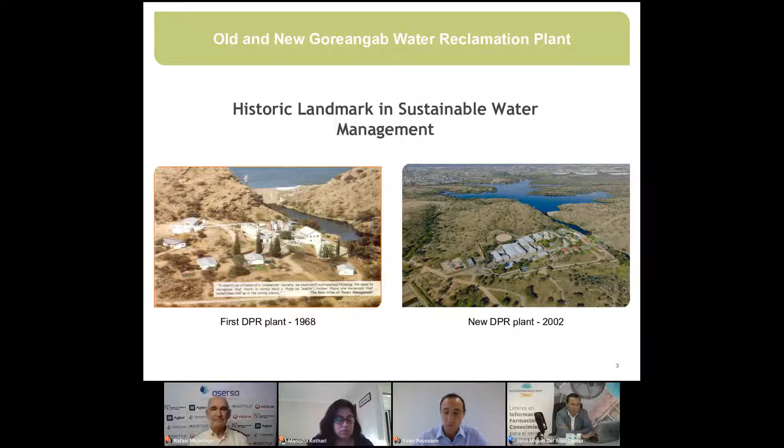So you see 2 pictures there. The first direct potable reuse plant, commissioned in 1968, which had a capacity of 4.8 megaliters per day. And the new DPR plant, direct potable reuse plant, on the right-hand side, which was commissioned in 2002, with a capacity of 21 megaliters per day. These 2 assets, the first one was decommissioned, the other one is still running to date and still producing potable water for the community and inhabitants of Windhoek, have been milestones in the development of water reuse for potable purposes, globally speaking.

So this is what I'm going to talk about today. I'm going to travel back to the past and give a bit of background as to why direct potable reuse was even considered in the first place, then how it was eventually implemented back in the 60s, what was the impact of public acceptance on this practice, which was completely new at the time, the impact that this has had on the community and the city of Windhoek, generally speaking. And then I'm going to transition to the future. So what is going to happen in the next few years for DPR and the city of Windhoek specifically.

Okay, so for those who don't know Namibia, it's basically a country of 2 deserts, the Namib desert and the Kalahari desert in the south of Africa. The Namib desert is extremely dry. It's a very beautiful place, but not a very welcoming one for humankind. Very difficult to live in this place. The Kalahari is a bit more welcoming, but still very difficult conditions, very dry, high evaporation rate.

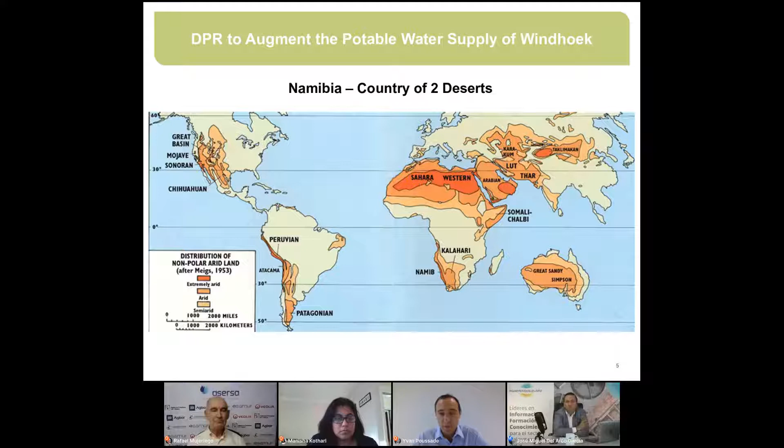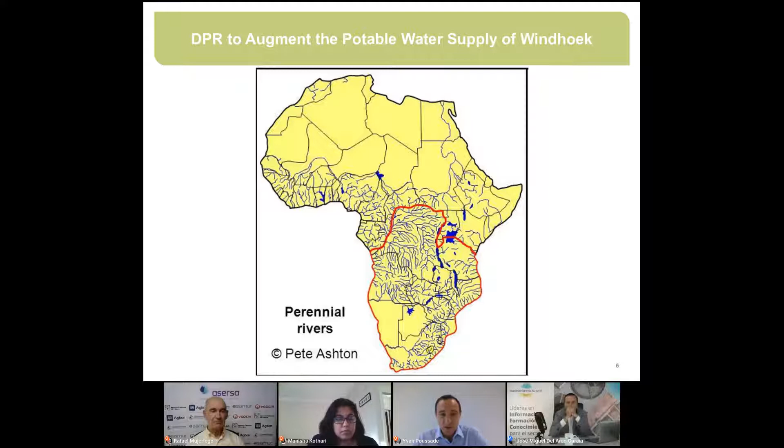And if you look at Namibia particularly, that's the country located on the west coast, just north of South Africa, you see that there are absolutely no perennial rivers across the country, which means that they do have rivers with water flowing part of the year, some years, but definitely not all year. So they have a lack of surface water resources. So definitely not a welcoming place for humankind to live in and be installed.

Yet the population started settling. So I think there's a problem with that slide. But anyway, population started settling in Namibia from the 19th century and started to grow in the early 20th century. They had water resources based on wells primarily until the first dam, the Avis Dam, was built in the first part of the 20th century.

But what happened, and I'm going to show that on a slide afterwards, after the Second World War, they had a massive population increase in the city of Windhoek, with the population doubling pretty much every 5 years for a period of time. And as you've seen, it's a place where water resources are very constrained. So there was a big imbalance between the water availability and the growing demand.

So they looked at different options. You see that before the 60s, they had 3 sources of water, 2 dams, the Avis Dam, the Goreangab Dam, and the aquifer as well, that they were getting water from. But these 3 resources combined could not meet the demand in a sustainable way. So they had to find alternative ways of securing their water supply.

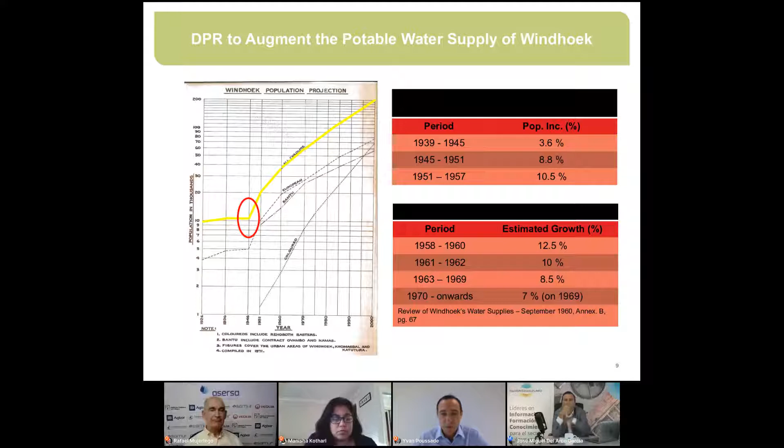So they had to stop and think as to how they were going to supply this population with water in this very adverse environment. The first thing they did, I would say the low-hanging fruit, was to cut on water losses, which they did quite effectively. They reduced the water losses in a short period of time from 20% to 7.5%, which is definitely a good mark. And by this way, they were able to save on water.

They looked at other sources of water, so additional dams, transfer from interconnection from dams. Some options were deemed not economically viable, so they were discarded relatively quickly. 2 dams were deemed feasible but expensive, particularly the Gammams III dam. So they were not put as a priority. And eventually what came out as a priority and the most feasible option was DPR, so direct potable reuse. So that was treating secondary effluent to a higher standard to be used as potable water directly.

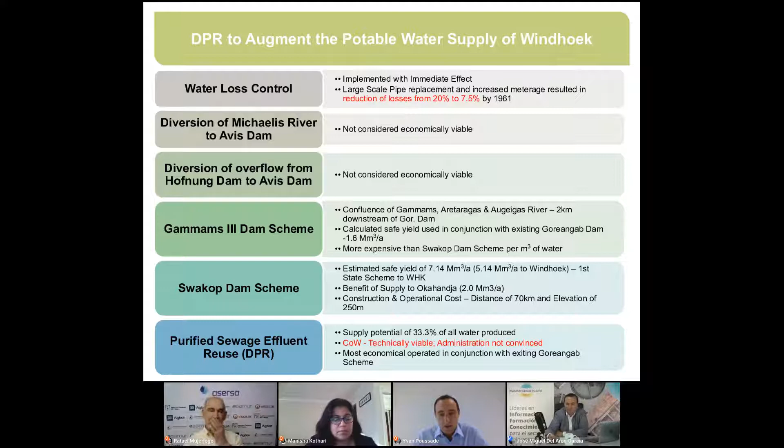Back then, it was a massive difference in mindset. I mean, we were still considering drinking water from one side and wastewater on the other side, and nobody was thinking about closing the loop. So that was a very, very massive change in consideration of water supply management. But eventually, they thought that they could provide up to 33% of their drinking water from DPR, from recycled water. It was deemed feasible, but it was difficult to convince the city people. And eventually it took a bit of time to be implemented.

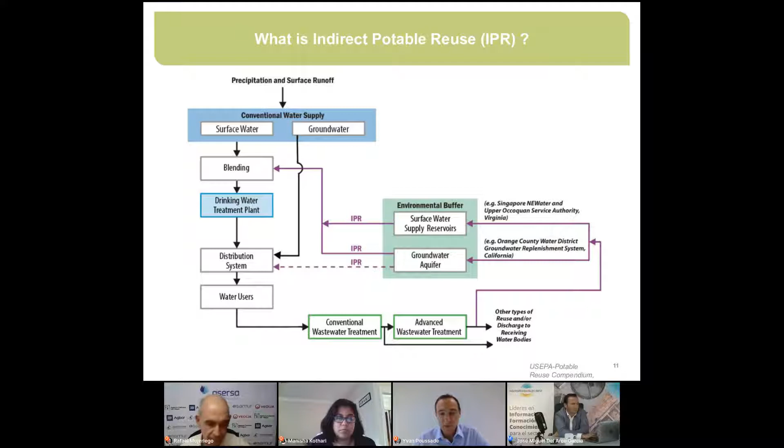I want to stop a little bit and come back, because maybe not everybody is familiar with this concept of direct potable reuse. Usually we talk about direct or indirect potable reuse. The difference is that for indirect potable reuse, you take a secondary treated effluent, you treat it further, you polish it, and then you send it back to an environmental buffer before it is then further treated for potable water production. So this environmental buffer can be groundwater, an aquifer, or a surface water, a dam. And in this dam, you have dilution factors, you have long hydraulic retention time. So you have a few things happening that are effectively considered as an additional barrier in terms of risk management.

Now, if you go to direct potable reuse, you don't have this environmental buffer. So you have your drinking water plant, your distribution system, your water users, so it can be municipality, it can be industrials. You have your wastewater treatment plant, and then you have your advanced tertiary treatment plant. And from there, you send it either at the inlet or at the outlet of the drinking water plant directly without passing through an additional buffer.

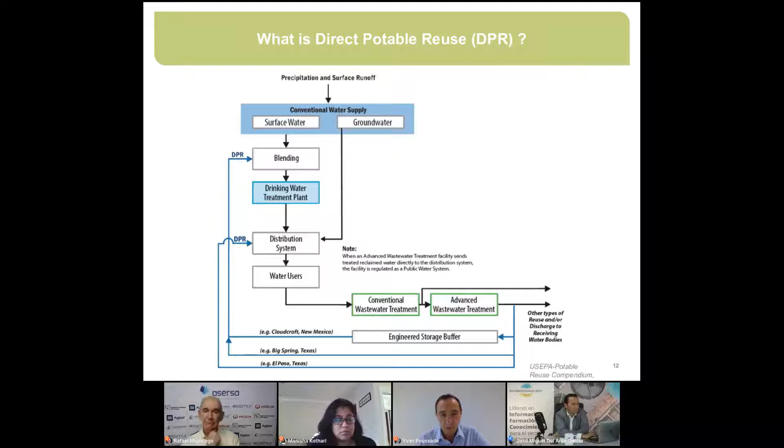And in Windhoek specifically, this is what happens. So you have the conventional wastewater treatment plant that is sending secondary treated effluent to a small pond where the water is pumped to the advanced water treatment plant. I'm going to present the process that is currently used on this plant. And then the finished water from this advanced water treatment plant is potable water and is sent directly to the distribution system where it's blended 1/3, 2/3 with water from other sources to be distributed to users. So this is direct potable reuse without passing through an environmental buffer in between.

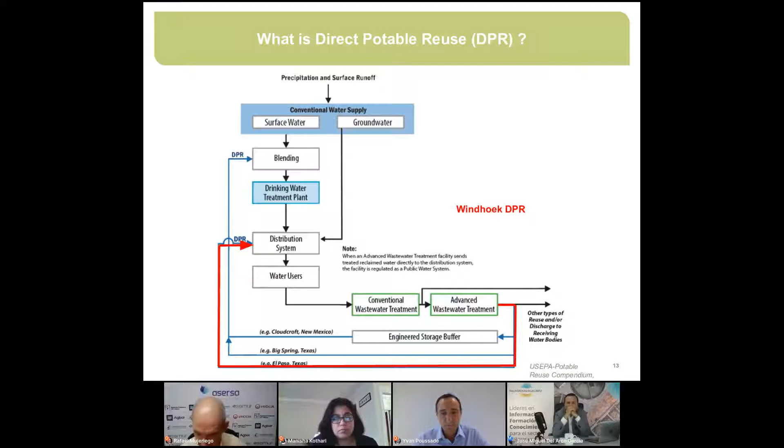Okay, so now I'm going back again in time to the 60s. What happened for potable reuse? So it was planned initially in the early 60s. It was delayed. It took a bit of time to convince people. They had to go through extensive piloting from 1962 to 1965. And eventually they signed off on the design and construction of a 4.8 MLD plant to be implemented. And first water was produced in October 1968. So that's 54 years ago, almost. And it was distributed. And immediately that accounted for 15 up to 25% of the total supply of potable water to the city of Windhoek. So the impact was immediate in terms of water resources for the city.

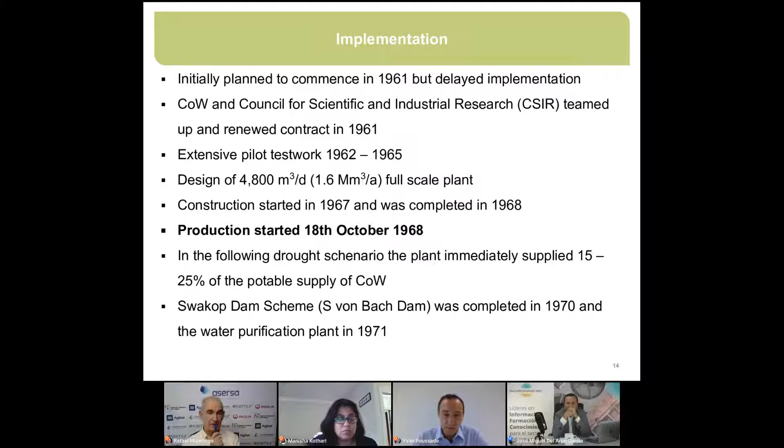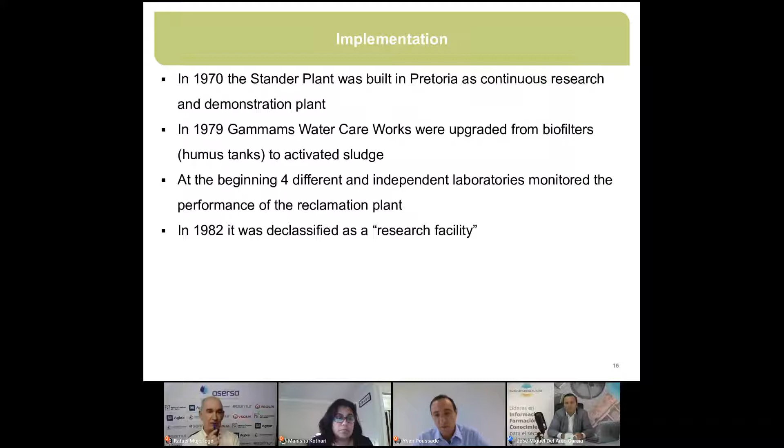So in the 70s, they started building other assets and improving the other assets. So after a few years, in the early 80s, the first DPR plant was considered as a research facility and not so much as a production plant anymore. So it was downgraded in terms of importance and significance for the supply in the Windhoek area.

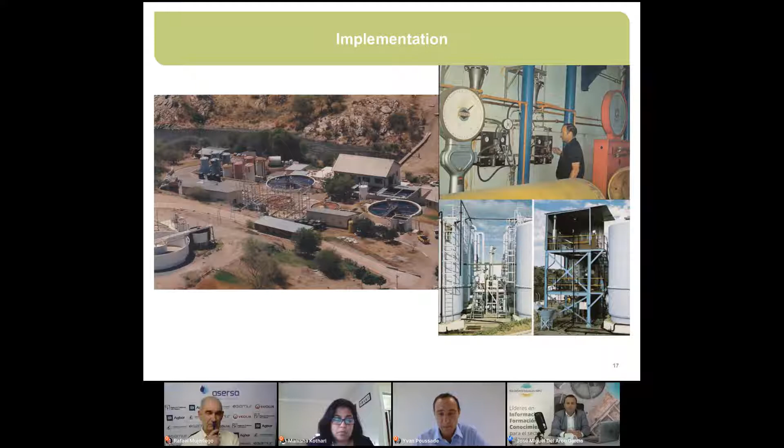the water supply. And eventually, in 2000, they ordered a new plant with an increased capacity, a more modern plant for a combined capacity of 21 megaliters per day, following the same path. So taking secondary treated effluent, polishing it, and then sending the water directly into the distribution system with a blending ratio of 1/3 of recycled water maximum to 2/3 of potable water from other sources.

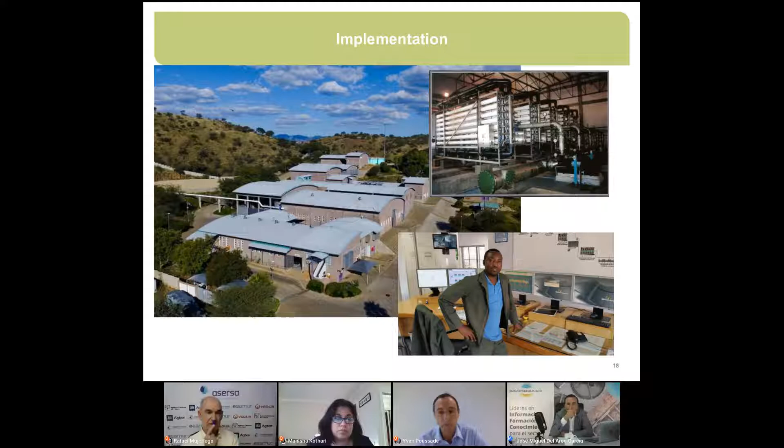Recently, in 2010-15, I can't remember the exact date, they built an industrial wastewater treatment plant, so that is absolutely dedicated to industrial effluent, to be able to collect all this effluent and treat it to a satisfactory level, while segregating from the sewer network that is feeding the DPR plant.

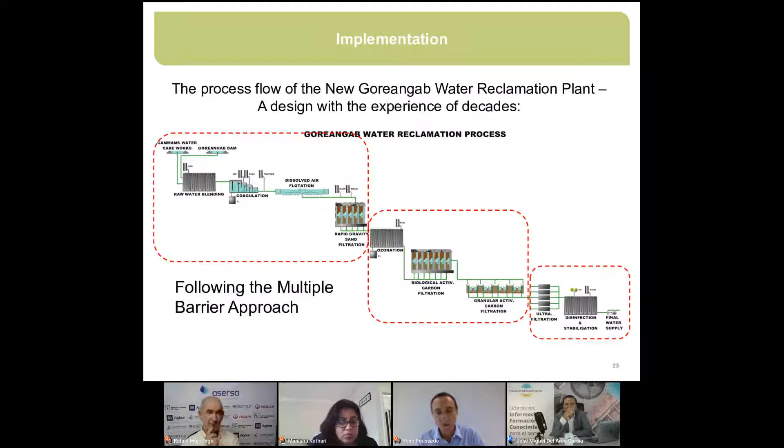So we can consider 3 blocks basically in this process. The first one, which I've called pre-treatment, very basically speaking, is mainly dealing with suspended solids and particulate pollution. So you've got a pre-ozonation, which is effectively the off-gas from the ozonation stage being added at the inlet. You've got a coagulation and dissolved air flotation step, so to provide enhanced removal of solids. And then you've got rapid gravity sand filtration.

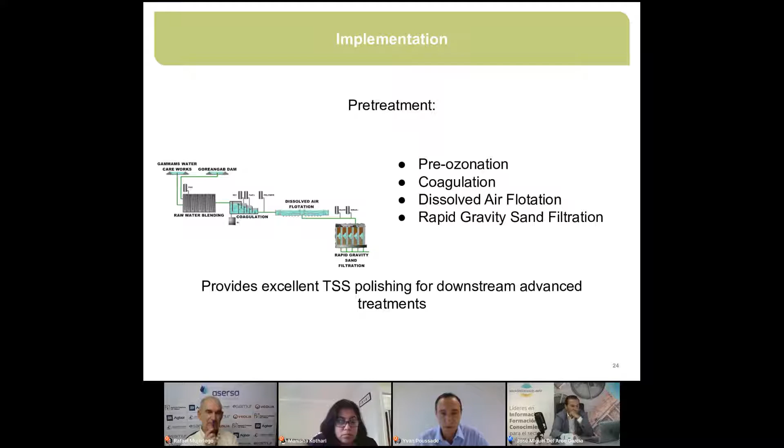So you've got a few barriers here to provide a quite effective tertiary treatment, but it's not yet a potable standard. But this is already good recycled water quality at this stage. The next process block, if you want, is the advanced treatment, and it's effectively combining ozonation with biological activated carbon filters and granular activated carbon filters.

So through this step, effectively, you're doing two things. The first one is quite an intensive disinfection process through ozonation. And the second one is the removal of dissolved organic matters and dissolved micropollutants. You break it down first through the ozonation process, because most of the organic matter that comes back from the wastewater treatment plant is hard, non-degradable matter.

Then it's processed through a first step of activated carbon filters that operate in a biological mode. So you have a combination of adsorption and degradation of this organic matter and organic molecules. And then you have a second layer, which is effectively a polishing of activated carbon filters that works just with adsorption and no biodegradation. So this process is very effective because that's how we control a lot of hazards in the source water, effectively the pathogens first, and also all the micropollutants.

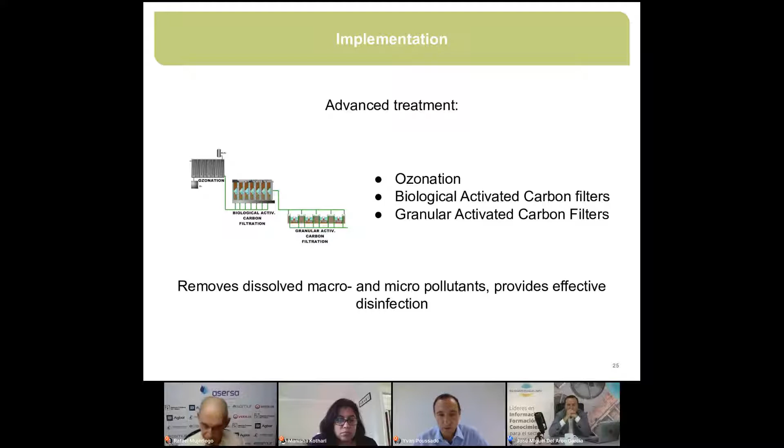And then the last block of treatment is the final polishing and disinfection, and it combines ultrafiltration membranes, so very fine filtration. These membranes are commonly used for potable water production. Then chlorine disinfection, stabilization, and then distribution and blending in the potable water network. So throughout the process, you've got 10 steps in total. Combined, that's a very effective multi-barrier approach.

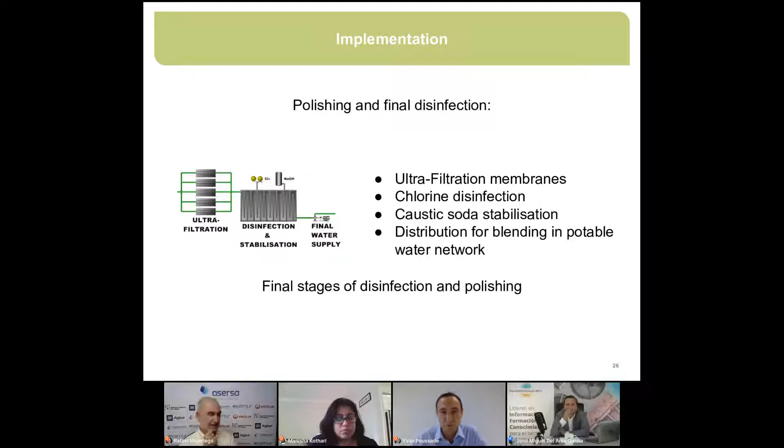Okay, so I'm not going to present the results in terms of water quality from the plant. Since 2002, there's been a lot of research done on this plant. I think the latest piece of work was conducted by my colleague and friend, Joseph Leinsteiner, who worked on antibiotic-resistant bacteria and genes. This paper was published earlier this year. So there's been a lot of work done on this plant, showcasing all the performance and the quality of the water produced from the process. So I'm not going to spend much time on that. I'm sure you can find different sources if you need to get access to this information.

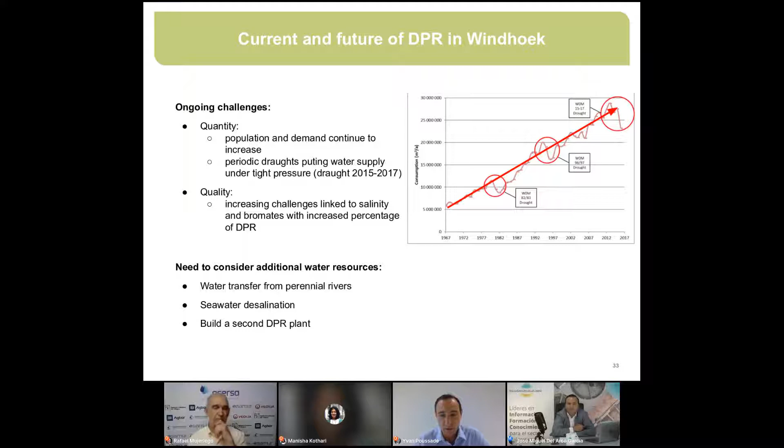So among these options, the most feasible option, at least the one that is looked at the most seriously at the moment, is the increase of capacity for direct potable reuse. They are considering building a second plant of equivalent capacity, so 20 to 25 megaliters per day for DPR, for direct potable reuse. They will have to change the process though. They will have to put a barrier for dissolved minerals because through recycling they are increasing the salinity in the city of Windhoek, which is something that is to be expected.

So they need to have an additional barrier for dissolved salts on this process, which creates the huge challenge of what to do with this brine. Because if you put a reverse osmosis membrane, which is the common process, then you have a clean water stream, and then you've got a concentrated brine stream. And being so far away from the ocean, not having any brine aquifer or saline aquifer creates a lot of issues. So it means they would have to push the recovery of the RO as much as possible and deal with this reject as a waste, which implies cost, of course.

But it also creates an opportunity, because during periods where they don't need this for direct potable reuse purposes, they may be able to recharge aquifers as well. So switching from direct to indirect potable reuse, depending on the need. This is a work in progress. There's nothing done yet, but it's certainly looked at quite significantly.

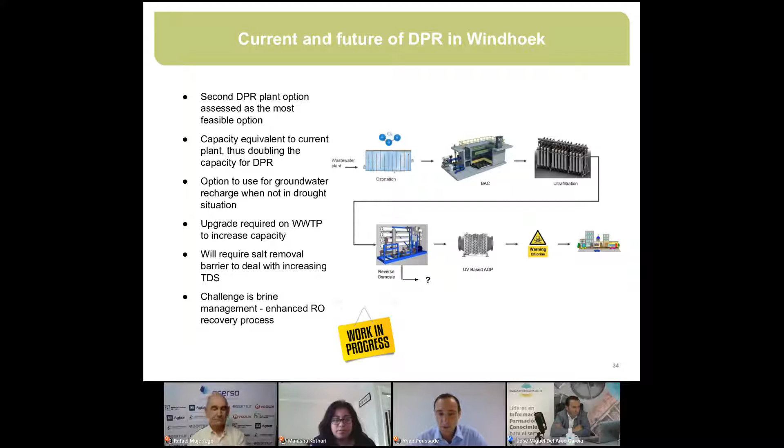Okay, so I'm going just to conclude that presentation with a few messages. I know that some of you might not be completely sure about that, but I can tell you that potable water can be produced from secondary effluent. I've been drinking water from 3 different wastewater treatment plants in Australia, in Namibia, and in Singapore, and I'm still alive. And I wasn't even sick. So it's completely doable. It's safe if you put the right conditions.

It's a practical and economical option, depending on the options you've got on the table, but it can be economical compared to other options. Certainly in water scarce areas, it needs to be looked at in combination with other options, of course. The low-hanging fruits that we mentioned, cutting on water losses, optimizing water demand, are the low-hanging fruits. But once you've done that and you're still unbalanced for your water supply versus demand, then you need to find alternative resources, and this is one that needs to be looked at, certainly.

It's not easy to implement, and the main barrier is public acceptance. So that's the key challenge. I am an engineer. I'm sure that we've got a lot of engineers on this call today. It's something that requires different skills. So we need to work with people who understand messages, communication, engagement. It takes time, but that's something that is absolutely critical and that needs to be considered.

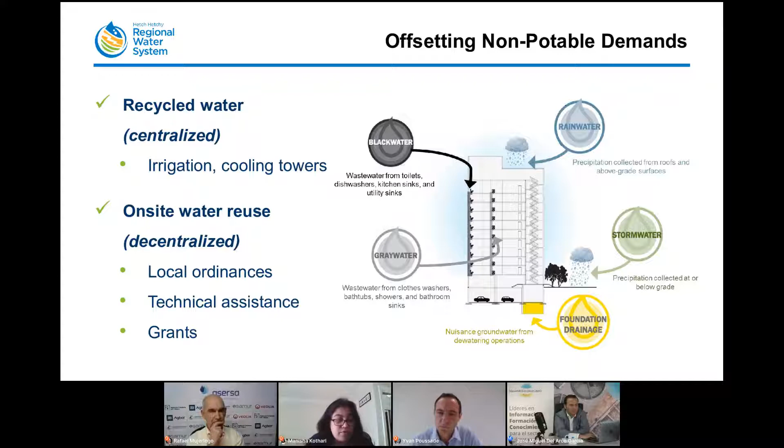And then finally, financial incentives. We provide grants to support not those who are required to reuse water, but those who would like to reduce their water consumption on a voluntary basis. We also offer grants up to $1 million. So quite significant.

In addition to that, on demand management, we work to minimize losses. We have losses under 10% in San Francisco, and we are moving towards 6%. This is our goal, and that is with leak detection technologies that we are testing, as well as pipeline replacements. In San Francisco, we have fully automated meters to check our water, and in the broader region, we are expanding that as well. So definitely a big push to minimize losses down towards 6%.

And then we are also looking at innovations. So new innovations, for example, atmospheric water generation. We have a lot of moisture in the air here, a lot of fog for those of you who have visited San Francisco. So we are trying to collect this and create enough water for small community gardens, for small spaces. But again, this is something that we can look to do to minimize additional demands on water in the city.

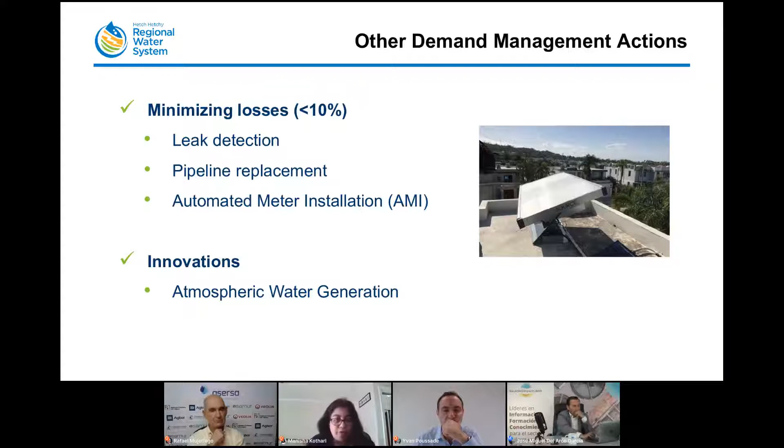So this is the concept of the circular water economy. We are thinking about our urban watershed, essentially, and how can you reuse the water that you get before you discharge it as waste. So this falls into the concept that we are talking about as we look ahead in water. So looking ahead, what are the main pressures? And you'll recognize some of these as common themes, I think, globally.

Drought, certainly, the Mediterranean climate that we share in San Francisco with Spain and France. We see that droughts with climate change particularly are becoming a bigger and bigger problem, with more severe and more frequent droughts we expect in the future. So this is a really big driver for us. Certainly resilience: with droughts and arid climate come wildfires. So how do we prepare and how do we have sufficient water supply, not just to fight the fires, but to have a resilient water supply?

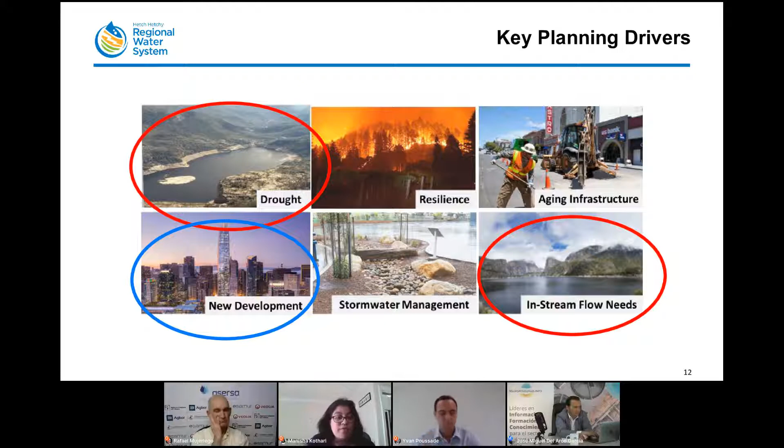So I would say for San Francisco, these are our two biggest drivers: our in-stream flow needs in the future, and drought and future drought because of climate change. Those are the two biggest drivers in our case. And so in that context, we need to look at demands and look at supplies. On the demand side, as I have described, we are doing a lot of things. We're doing, I think, whatever we can, and we are always open to new ideas. We are not going to stop trying to manage our demands.

But at the same time, we see that there is a need for new supplies. And this is where alternative water supplies comes in, right? Once you have done as much as you can on using what you have available, you then eventually have to find new supplies. And we all know that water is a finite resource. So finding new supplies is a bit tricky. There is no such thing as new supplies. So how do you balance it?

In San Francisco, we see that we have a need of about 382 megaliters per day in future droughts, or we could be facing shortages of up to 50%, which, if you are already conserving a lot, is a very difficult thing to do. So this is what is driving our push and our search for new supplies.

So what did we do in San Francisco? First, we looked at our geography and we said, okay, where are our facilities? Where is the infrastructure located? Where are our water treatment plants? Where are our wastewater treatment plants? Where are the pipelines that already exist? And how can we connect new dots to make new connections and move water more efficiently, and also leverage wastewater treatment plants as a resource?

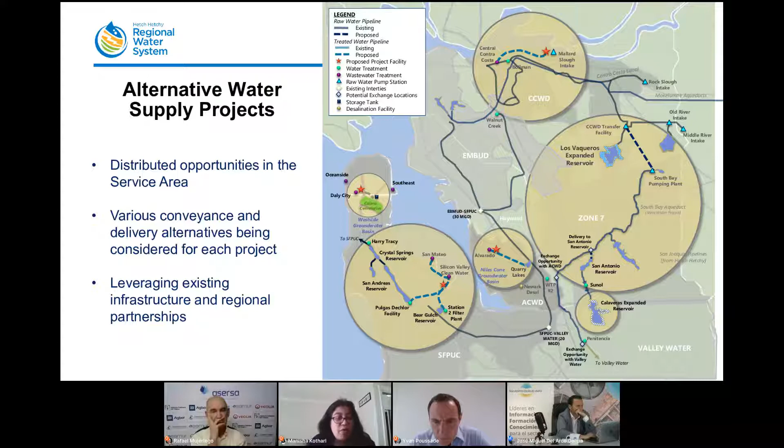And really, as I mentioned, there's a very limited opportunity for new potable supply, because now if you have done everything on conservation and you have done as much as you can on non-potable, you need to identify new potable supplies. And so for potable supplies, we have basically 4 options that we have identified. One is transfers.

Transfers we find, certainly in Northern California, a very limited opportunity, particularly as we look ahead into the future, because transfers means somebody else has excess water supply that they can provide. As there is more pressure on everybody, there is less excess supply available in other areas. So we see transfers as a temporary or short-term measure, but not a long-term sustainable supply source. So we do expect to rely on transfers, but for a small portion of our needs, and decreasing over time.

Purified water. Now, purified water here is the term that we have adopted in California. It's used very commonly. It includes all potable reuse from IPR to DPR. And we are really considering the whole spectrum of potable reuse, and we are referring to all of those aspects as purified water. So we are looking for purified water in San Francisco, like in Windhoek. We do not really have an indirect potable reuse option on the table right now. We are looking at direct potable reuse for San Francisco. But if you look at the broader region, there are other opportunities for indirect potable reuse as well.

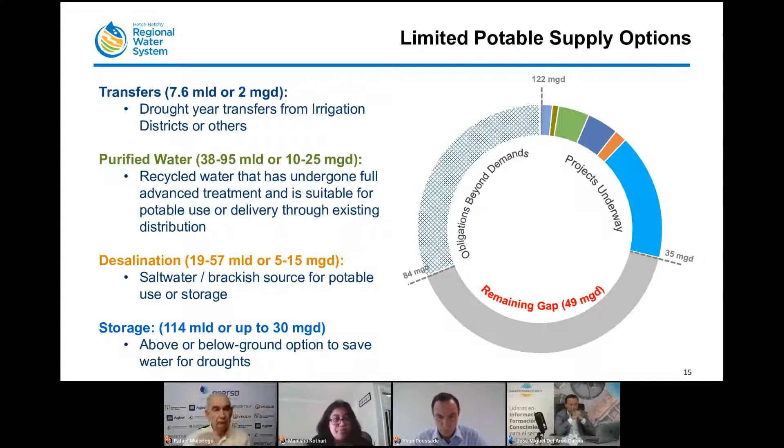Then finally, storage. Because our need is really primarily a drought need, we are able to think about leveraging storage, expanding storage, both above ground as well as below ground. So groundwater recharge, as well as surface water, dam raises and surface water supply increases. So storage is another way for us to manage for future droughts and our water supply. So those are really the areas we are concentrating on. There are many challenges.

Certainly, I mentioned many of these projects are partnerships, so there might be very complex multi-party partnerships between water and wastewater, between agencies that have not traditionally worked together, but even between water agencies. We all have our different service areas. In the Bay Area, we have 8 major water providers. So we are working more and more together, but it's very complex, and we are learning how to do it.

Also, certainly, as we look at potable reuse, it would require a lot of new operator training. This is a significant challenge for traditional water operators to learn how to work with wastewater and understand the characteristics of using membranes. Because our primary water supplies in the Bay Area are high quality surface water supplies, it requires very minimal treatment, if any. And so to now cross-train with wastewater treatment is definitely a new challenge for us.

Of course, the high costs, high capital costs, and even bigger than the high capital costs are the high ongoing operations and maintenance costs. These are going to be very significant with these types of new projects, whether it's desalination or purified water. There are also new regulations being developed in California. We expect new regulations for direct potable reuse by December of 2023. It is not yet regulated in California, but the regulations are coming, and the water utilities are participating in reviewing those draft regulations from the state.